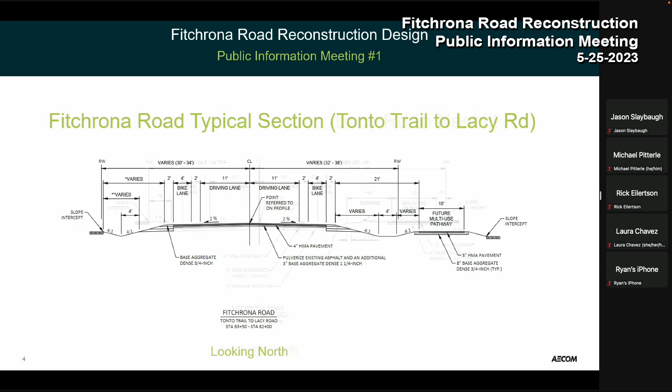Then we've got a section of Lacy Road, from Lacy Road up to Nesbitt Road, a kind of general section. The idea is to have curb and gutter in that section, with two 11-foot driving lanes northbound and southbound, similar 2-foot wide bike buffers, and 4-foot wide bike lanes on both sides, then the curb and gutter.

Now, as we get in the vicinity of the Lacy Road intersection, there's going to be turning lanes we'll need to have happen there. Right now, the plan is to only add turning lanes to Lacy Road, not to Tonto Trail, Pheasant Lane, Goose Lake Drive, or Quarry Vista Drive.

But we'll look at turning lanes just because that's where the big movement is, and Derek will be able to fill us in a bit more as the design progresses, on the traffic counts he's done, as well as the traffic forecasting he's working on with the Metropolitan Planning Organization to help identify the long-term traffic forecasts for this area.

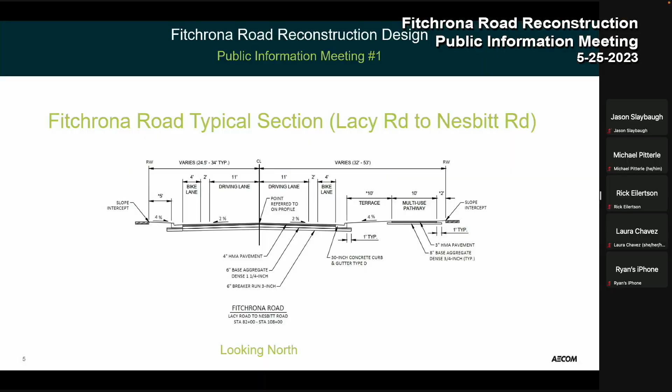That's basically the rest of the section. We do have a couple other areas. Under the Military Ridge State Trail is going to be a very challenging area, we have this abutment that's kind of hanging up way up high. At least based on the plans we found from DNR, there's not a piling system underneath here, so we'll be designing a pretty significant retaining wall, and may need to do something specific to that existing abutment to make this work to get the path underneath the Military Ridge State Trail Bridge.

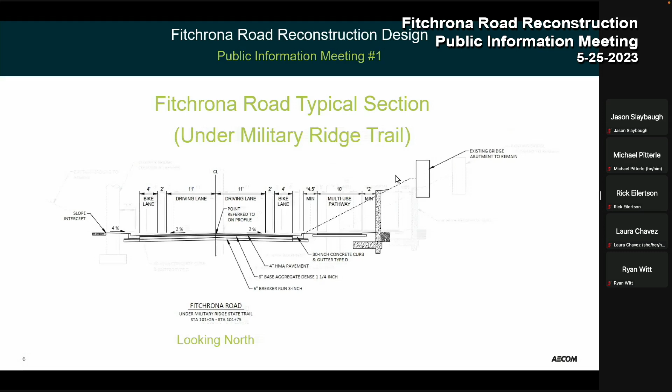Similarly, between the piers for the US 18/151 Verona Road and the existing bridge abutment, we're going to try to get that 10-foot wide asphalt path if we can. We have the ability to potentially shrink that down to 8 foot in that area if we have space constraints we can't deal with, but our hope is to at least have a continuous 10-foot wide path if possible. Again, there'll be a significant retaining wall included as part of that design.

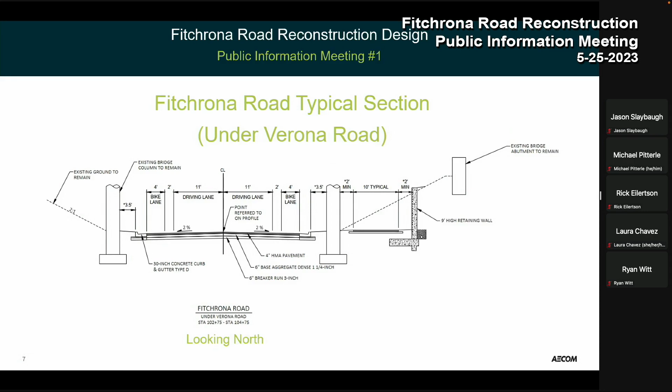As we get closer along, now we've got the existing survey, and Andrew and I will be working with our structural engineer, Matt Krippner, and his staff on designing that retaining wall. Matt's already had a chance to talk with Bureau of Structures staff at DOT, and no initial huge red flags. We think this is something DOT would allow, but it's still a long ways from having that permitted and figured out. As we design it, we'll be working closely with Bureau of Structures staff and the region team to make sure that's acceptable to DOT.

At the Tonto Trail, Pheasant Lane, and Goose Lake Drive intersections, our plan is to basically follow Wisconsin DOT guidance for either a Type C or Type D intersection. Not really a turning lane, but we'd have tapers going from the main traveled lane to the radius point. The Type C basically is what's there right now, more or less, I guess kind of less since there's really not a taper currently. We'd be looking at designing that taper, and it could either be an asphalt radius on both sides, or the Type D shows the curb and gutter radius. So there's pros and cons to each of those options.

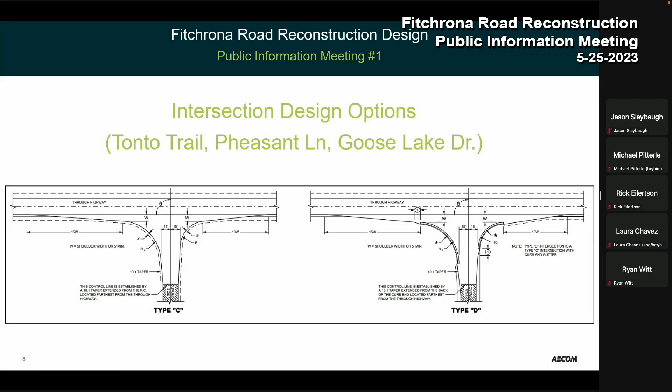Certainly, if you have preferences, we'll be talking further with Chris about that. Obviously, the curb and gutter would be a higher cost, but there are potential benefits, just for defining the edge of pavement a little better, and potentially having less rutting that might occur from trucks or vehicles taking the corner short. Again, some pros and cons for both, cost versus benefit, that we'll be talking more about with Chris as the design progresses.

Then the other thing we're especially interested in any feedback on is how we address the Lacy Road intersection. There are 4 different alternatives that were already reviewed back in 2020, and there's a report that KL Engineering helped the city put together that I believe Ross is going to put on the Fitchrona Road webpage as well. But there are 4 different alternatives.

Alternative 1 is this area on the left, basically more or less the current configuration with a stop on Lacy Road and no stop on Fitchrona Road, but improved to add a left turn lane, with potential medians going in. With all that additional pavement, it's going to widen that area out, so all of them have impacts on various portions. Pretty much all 4 alternatives have a similar impact on Diane's property on the southeast corner, and also a pretty similar impact on the northeast corner.

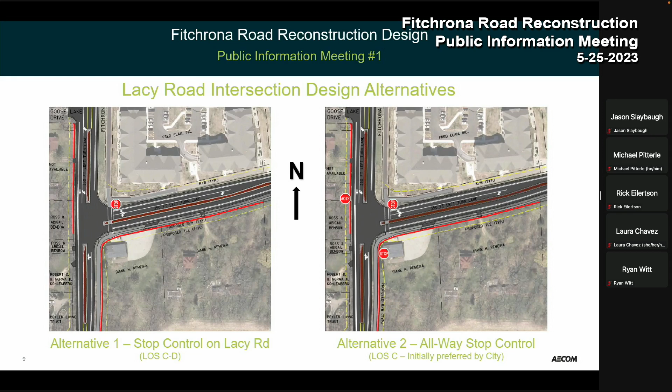The other thing being medians. Medians are great when you do introduce turn lanes because it provides that defined location of where your turn lane is, and then also prevents oncoming traffic, whether that's turning or through oncoming traffic, from entering your turn lane. Sometimes it's difficult, especially in Wisconsin when we have snow-covered roads, to really know where that defined turn lane is. A median can help that significantly. Additionally, geometrics, medians can really improve truck turning traffic. So we do have to take into consideration the radii of this intersection, and the medians can significantly make it easier for this truck traffic to maneuver the intersection.

Great, yeah, thank you. Yeah, you're welcome.

So then alternative 3 basically shows that traffic signal that I mentioned, and that does work in the long term. Is this at the 20-year design life? Do you remember the level of service B? That is for the design. I don't remember what this study was designed for, but it was probably the 2040 to 2045 timeframe.

So that future level of service is acceptable, level of service A and B, shown for the roundabout and signal. And then the fourth alternative identified in that report is basically a roundabout, and that actually was showing a level of service A.

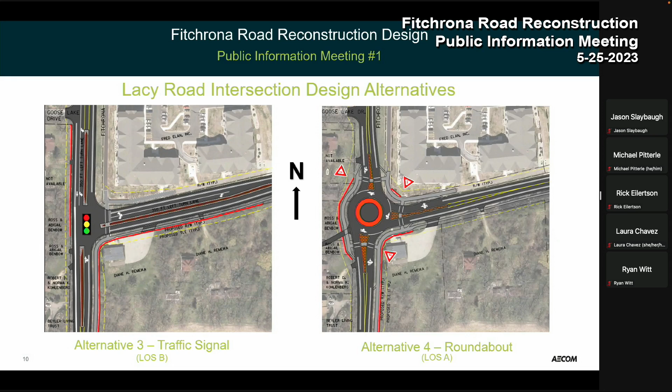Yeah, a couple of things with the roundabout. With the level of service being A, it's kind of evident, but this configuration provides the biggest room for growth. When we do see development start occurring more south on Fitchrona Road, this roundabout will be able to accommodate that traffic. There is room for additional capacity without extra turn lanes. We are only seeing one lane roundabout here that can operate very well. This alternative actually has less pavement at the intersection than all three other alternatives.

And then also the continuity with the other roundabouts, do you want to talk about that? Yeah, absolutely. We have continuity to the north and east now with Seminole Highway to the east and Nesbitt Road to the north having roundabouts. Driver familiarity is huge, this being a safety benefit to the area. Drivers running through roundabouts one after another, they expect it, they know what to see, they know how to maneuver them once they've gone through them once.

Additionally, roundabouts can also help other safety issues as well. We do have a little bit of crash history at this intersection, about 5 crashes in the last 5 years, about 1 crash per year. Some of these crashes have been pretty high severity with injuries included, more of angle-type crashes or left turn crashes. Part of the reason is sight distance issues when vehicles are looking to the south. A couple crashes were noted where a vehicle was not able to be seen. A roundabout will significantly improve that safety-related issue, almost eliminating angle crashes and left turn crashes.

Roundabouts do at times see a slight uptick in crashes, but they're much more of the low-end, property damage only type, little fender benders and side swipes. So you're really protecting the individuals behind the wheel now, and also creating this traffic calming effect going through the corridor.

This is a more rural section. When you get south of Nesbitt, you probably notice some traffic travels at high speeds in this segment. This roundabout will slow traffic, getting it down to a more reasonable speed through this area. And you don't have quite as much space between the Nesbitt roundabout and the Lacy Road roundabout now, so traffic probably won't get up to the speeds they used to previously.

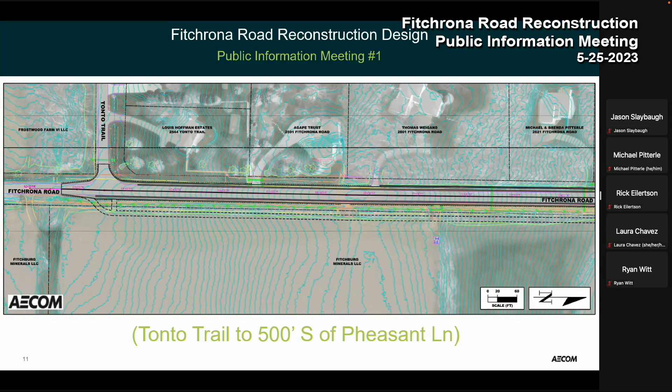I had a chance to talk with the Schultzes, and we'll take a look specifically at the large oak that they mentioned. If there are any other trees or things that are there, let Chris Barnes, myself, or Ross know. All of us are listed in the contacts at the beginning slide as well as at the end slide. There are also comment sheets that you can fill out tonight, or take them back with you and fill out later.

Just Ross's email is at the bottom of that comment sheet. We'd like to get those comments by June 9th, just so we can get that to our project team and start working on making sure we address those comments if we can.

The next one is obviously starting to get a little bit busier. We're showing Fitchrona Road north of that high point, again still proposing curb and gutter. We've got a little bit of a gap here that we may extend the curb and gutter all the way through. We're showing the alternative, kind of the alternative 1/2 alignment in this exhibit, just because that was the initial city preference, this all-way stop control configuration.

Because we're hoping to be able to utilize this existing swale on the east side of Fitchrona Road for stormwater treatment, that pushes, with the turn lanes, medians, and a through lane here, the proposed curb and gutter onto these adjacent properties. So obviously there'd be right-of-way acquisition that would need to be negotiated for all of these property owners.

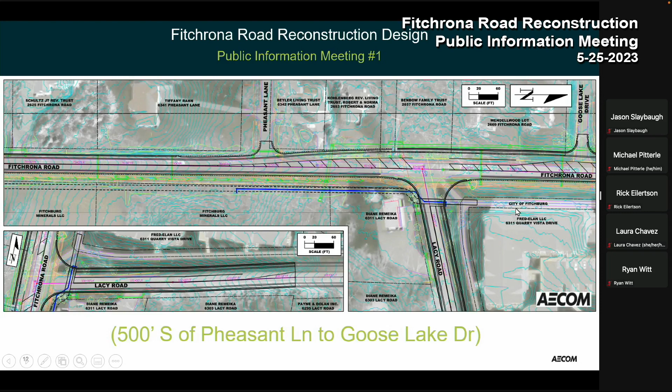There's another stretch on Lacy Road I had a chance to look at that was put in 2017, and that's performing even better in my opinion from the surface. Both of these are looking pretty good, and that's one potential stormwater treatment recommendation we may be making. There are trade-offs for pervious asphalt pavement — generally the design life isn't as long as standard asphalt pavement, but the nice thing is you get some stormwater performance standards that can be met.

Then as we're going farther — did I jump one too far, or no? Yeah, I did.

Obviously you can see the impacts we have from where we're starting that median in this area, between Lacy Road to the south and Quarry Vista Drive here. We're showing a potential asphalt path right about at the existing right-of-way line, just to try to minimize impacts — we've got homes very close on the east side, and some homes close on the west side as well. If the roundabout goes in, it won't have nearly as much impact on this particular property, but there's going to be impact here.

I'll also say that currently drainage happens in this existing swale on the east side of Fitchrona Road, then crosses in this 48-inch diameter corrugated metal pipe at about a 45-degree angle, goes underneath this driveway at Laura Daly's property, and then discharges into the existing swale that's all on these private properties currently.

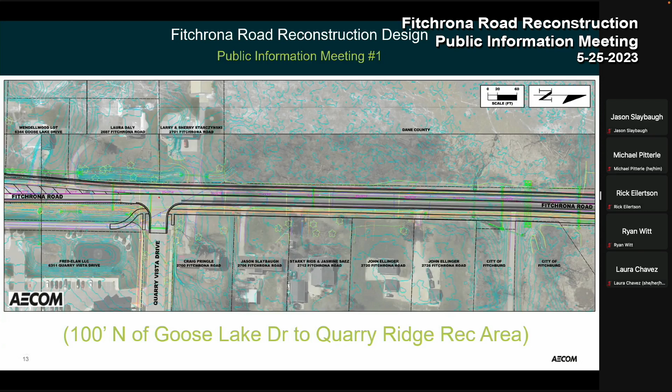There are some other things. Ben mentioned the potential that if MMSD no longer needs or uses that effluent return line, there could be a way to design a system that pumps into and discharges into that line. Alternatively, there could be a way to improve or increase infiltration through the Goose Lake system, and/or put a pipe in to allow groundwater, not uncontrolled stormwater, to help lower the groundwater table in this area. So those are some of the different things we're starting to look at.

A couple other things on this slide, and I'll try to wrap up here on the plans. Again, we mentioned the discharge location—this is the MMSD's pumping station 12.

So these are some of the improvements Chris talked about, basically on the backside, farther on the west side of Goose Lake. But those pipes connect into the gravity system. There's a 48-inch or 54-inch gravity pipe that drains to the lift station, and a 36-inch force main that comes out of that pumping station and pumps it through Fitchburg to the east, over to pumping station 11 on the far northeast corner of Fitchburg, which then lifts it and pumps it over to the Nine Springs treatment plant.

That effluent return line we talked about comes right alongside that 36-inch force main, between the Military Ridge State Trail and Verona Road.

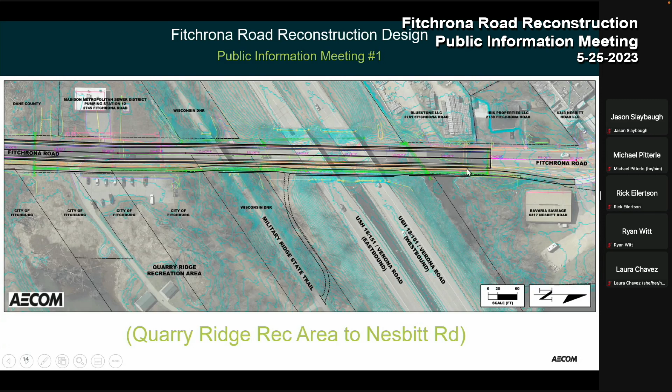I think that really covers everything I had on the plans. Then on the schedule—we started basically just 2 months ago in March working on construction, and we've got pretty much all the survey done.

Andrew's going to check on a little bit of a gap on Lacy Road, because we didn't know the Lacy Road project was going to end 400 feet back. But Ross was able to send us the topo that came from the Lacy Road project, so I think we're probably good there.

We're pretty good everywhere else, other than maybe we don't have that trail connection up to the Military Ridge State Trail. If it's a future path, we can just identify that as a concept. We may not need a topo survey for that, at least for the concept plan. But we've got that pretty well done.

Task 2 is more related to the transportation project plat, and identifying where those right-of-way impacts are. That would be more towards after we're done with at least 50% plans. We'll start working on that later this fall, basically fall and winter.

And then wetland delineation, we just started desktop analysis a couple weeks ago, and field work started this week. We should have that field work wrapped up by July.

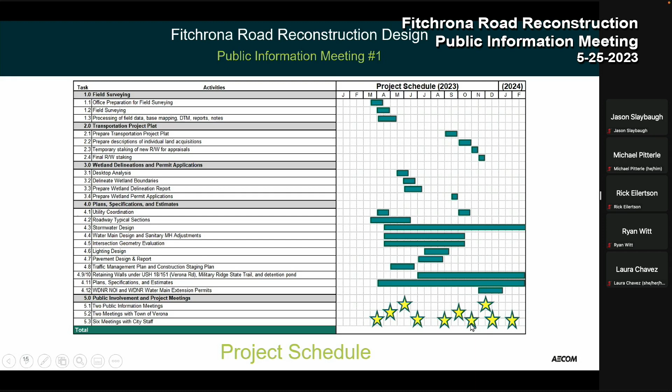So, project challenges. We all know that Fitchrona Road has been flooding a lot, more in recent decades and years. Some of the other constraints are with getting that asphalt path.

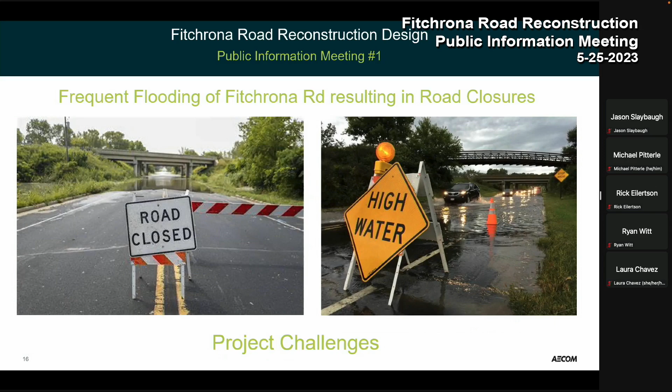I think we've got a much better approach than what I even had envisioned so far. It may not be a perfect approach, but based on the challenges we have, I'm pretty comfortable saying it'll be a big improvement over what's there currently. It'll have some potential negative impacts that we want to be aware of and talk through.

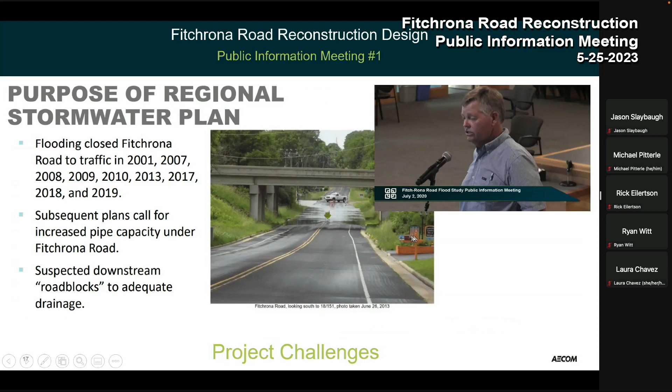These are a couple of slides related to the work that Ben and Chris talked about related to the Fitchrona Road flood study. This is actually a slide from AE2S's plan.

It documented some of the years, while I was here, when Fitchrona Road flooded on a more regular basis. The city doesn't always get cones and barricades out every time water's on the pavement, but when it lasts for prolonged periods, that's basically when they've put barricades out. There's a lot of people that will drive right through that. One person I won't name, when he was young, grew up in this area, floated his vehicle, and pushed it off to the side to keep it from washing down. Some interesting stories.

But again, we are looking at providing increased pipe capacity for this area and improved conveyance.

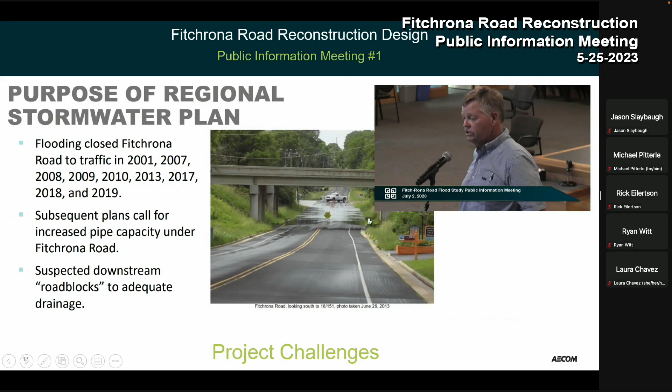This gets into the recommendations from the AES slide that Chris suggested I add. This basically shows some of the roadblocks effectively in stormwater drainage. You can see Fitchrona Road here on this end, going to Goose Lake here.

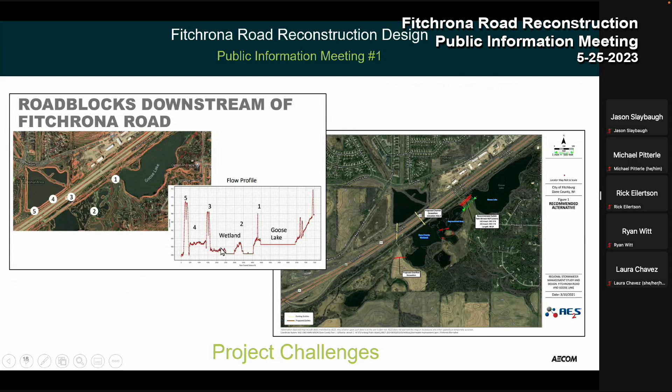I don't know, Chris, if you want to drive. The mouse is right here if you want to come around. I really appreciate your patience tonight. Ben and I are here if you have specific questions, maybe afterwards you can contact us and talk about it. But in the interest of time, we'll try to move ahead.

That's the last slide. Any general questions that people have before we go back into the open house format?

We have a question from online. Jason Slaybaugh wants to know if there's a plan for the power lines along the path on the east side of the road. We haven't started discussions with the power companies yet about that, but that'll be one of the next things. We know there's going to be impacts to those. Probably within the next month we'll be starting conversations with the utility companies about what it'll mean to remove or relocate those. Anything in the existing right-of-way, the city of Fitchburg and town of Verona can compel those utilities to move at their own costs. If it's on easement, then the project would need to help reimburse those costs. But we've got plenty of time before construction starts to work through those issues and opportunities.